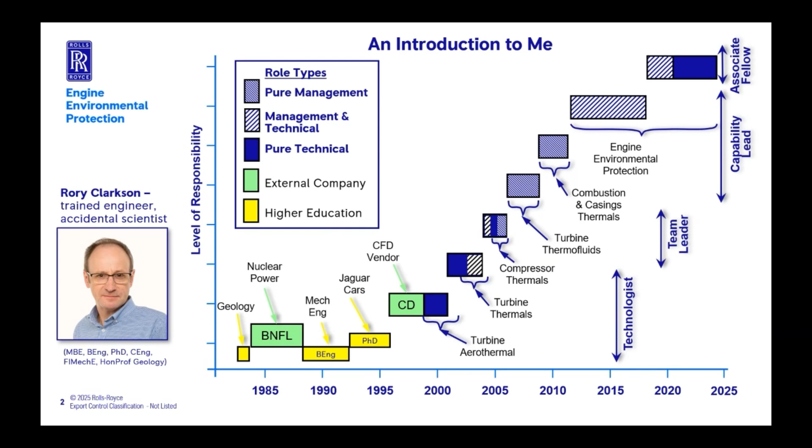But the last 15 years, in 2010, which was an interesting year for aviation for a number of reasons, I've been purely involved in this topic of engine environmental protection.

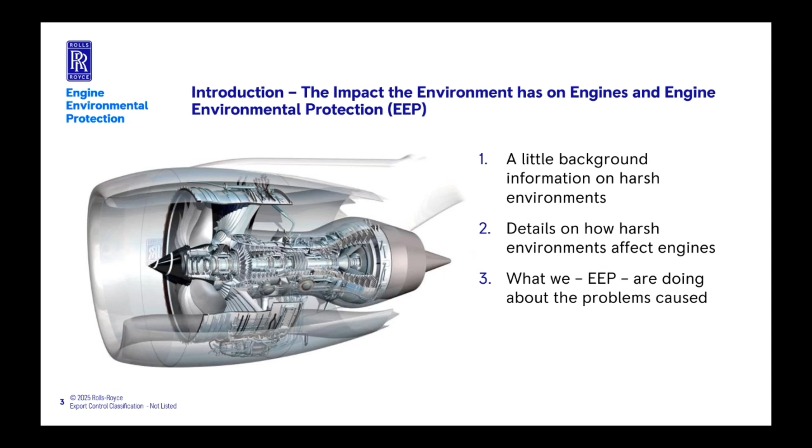So this is what I take people through: a bit of background on what are the harsh agents or elements of the atmosphere that cause problems for aircraft engines, some detail on how they affect engines, and then what we, Engine Environmental Protection, or EEP as we call ourselves, are doing to help the company and the industry mitigate the problems they cause.

Whether people realize it or not, we almost exclusively, not quite, today still design engines for an atmosphere that doesn't exist. The international standard atmosphere is a thermodynamic ideal. You talk to pilots, they've never flown in it. You never get it. We might think about what it looks like on a hot day, but that's a simple graph of the international standard atmosphere.

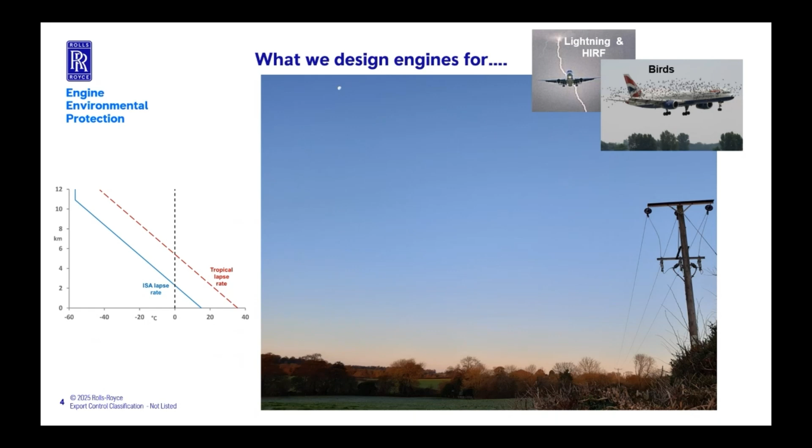We do design engines with things like birds and lightning and HIRF, high intensity radiated field, space weather, rays that come from space. We do have design rules for that, but there's lots of other things in the environment which we don't generally design to.

One thing I mentioned before we started as a preamble to one or two in the room: climate change. Climate change is having an impact, and it's changed things. Even if you take the thermodynamic ideal of the ISA, International Standard Atmosphere, it's no longer applicable, because we know the lower part of the troposphere is warming up. What people may not realize is that the stratosphere and the upper reaches of the troposphere are cooling down, and it's to do with the carbon dioxide in it.

I understand why where we are in the troposphere is getting hot, because the infrared radiation isn't able to escape, so we're warming. But apparently, I need to read up more on the science, when you get to the top of the troposphere and into the stratosphere, carbon dioxide works the other way. It actually increases the radiative heat loss out into space. So the stratosphere is cooling down, and the top of the troposphere as well.

Cruise altitudes are getting colder. We think, oh, that's interesting. Is that a problem? Well, because we design aircraft to operate at a Mach number, and we're all very clever engineers, we know speed of sound is proportional to the square root of the temperature. So if the temperature of the air you're flying in drops and you're flying at a fixed Mach number, your ground speed reduces.

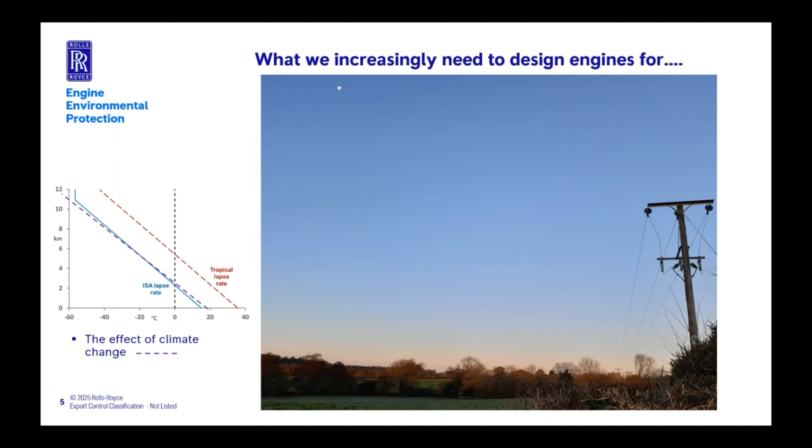But what the EEP team really focus on is things like this: the presence of water in the atmosphere, which is essentially what makes the ISA day, the ISA International Standard Atmosphere, ideal and not real, because water changes the thermodynamic profile as you go up. Water in itself causes problems, and these are the main agents that we worry about, and we'll talk through how they affect engines.

So freezing fog, freezing cloud, that's tiny water droplets at 4,000 or 5,000 feet up to 20,000 feet kind of altitude. You go higher, the water will be ice crystals, and that causes problems, or cumulonimbus clouds. At the bottom of those, you get a lot of rain and hail, and this one's lightning and things.

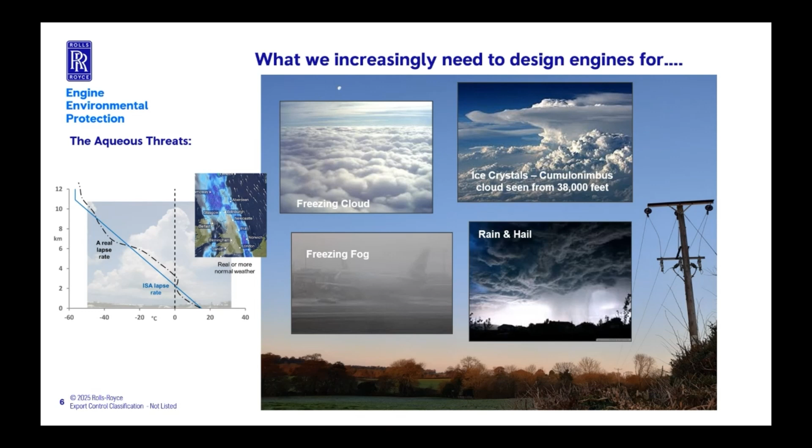So they are problematic. In recent years, certainly since 2010, the world woke up to the reality. People knew about it, but it was a select few. Volcanic ash is a problem for aviation, and volcanic sulfur is as well. Pollution from what we call anthropogenic activities, human activities in terms of transport, cars, ships, aircraft, but also production of petrochemicals, burning of coal, things like that, corrosive gases and aerosols in the atmosphere, and mineral dust, often called sand or dirt.

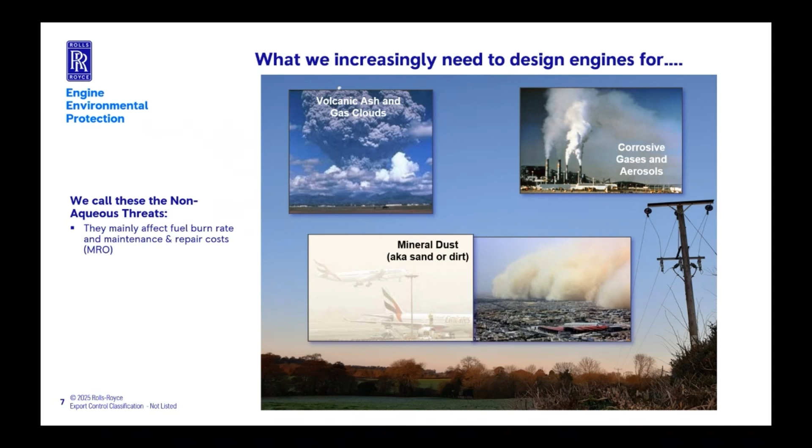So this is a little question, I won't potentially embarrass anyone in the room: why does the troposphere get colder as you go higher in altitude? I was told this at school and even part of my degree, but it never quite stacked up. It was never a complete story: as you go up, the air pressure drops, therefore the temperature drops.

If that was simply the explanation, why would the stratosphere get hotter? The pressure's dropping, but it's getting warmer. There is a... I'm looking at the faces, interesting. I'm very confident we all know the science to explain why the troposphere gets cold as you go higher.

It's to do with tropos meaning turning, the churning of the air, and that's the clue there. It's to do with the adiabatic expansion or near adiabatic expansion of an ideal gas. So you've got air down at the ground, which is compressed and at high pressure and therefore small volume. As it rises under a buoyancy effect or convection, it expands, and if you expand a gas ideally adiabatically, it will get cold.

Conversely, when it turns at the top and comes down, which is what's happening here, we're in high pressure, the air's falling and getting compressed, it gets hot. And it's that turning that is the reason why the troposphere gets cold.

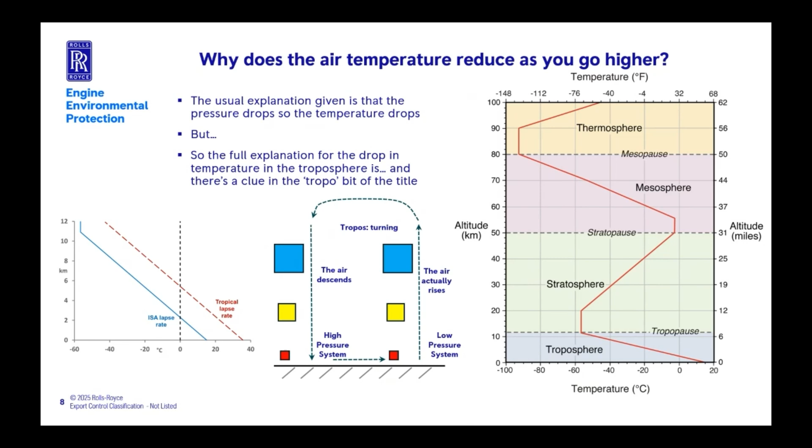So the tropopause above the equator currently is about -80 Celsius. Above us, it's about -50. And it's because the tropopause above the equator is about 50,000 feet. Here, it's about 30,000 feet. And it's to do with that. Simple thermodynamics, but that's never explained like that at school. But we can all understand that.

Anyway, that gives you an idea of the kind of science we as EEP engineers, and most of us are engineers, need to understand. So let's think about the effect of this temperature on water.

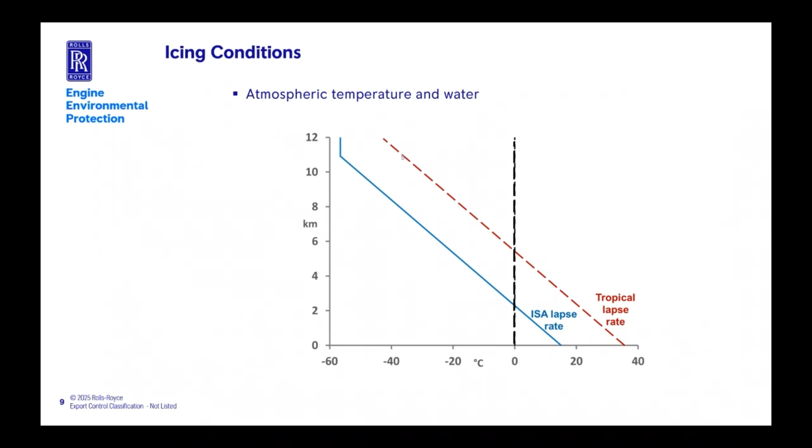Another surprising piece of information for many people is water doesn't freeze at 0 degrees C. It will, given a good excuse, like a nucleation site or a surface to start crystallizing on. But if it's pure and not in contact with anything, it can get down to about -40 before it actually forms a solid. But if it's below 0, we call it supercooled, and it behaves, if it hits a cold enough surface, it will freeze almost instantly.

If you go higher in the atmosphere, because you're now getting much colder, it's sufficiently cold for the water to actually crystallize. Sometimes it will sublime from water vapor, forming crystals of ice. So a cirrus cloud, and contrails, are ice crystals, tiny particles of ice, not actually liquid. Whereas much of the cloud, cumulus clouds you look at outside, when there are any, it's usually water droplets. And if it's high enough and cold enough, they'll be supercooled and you get freezing cloud.

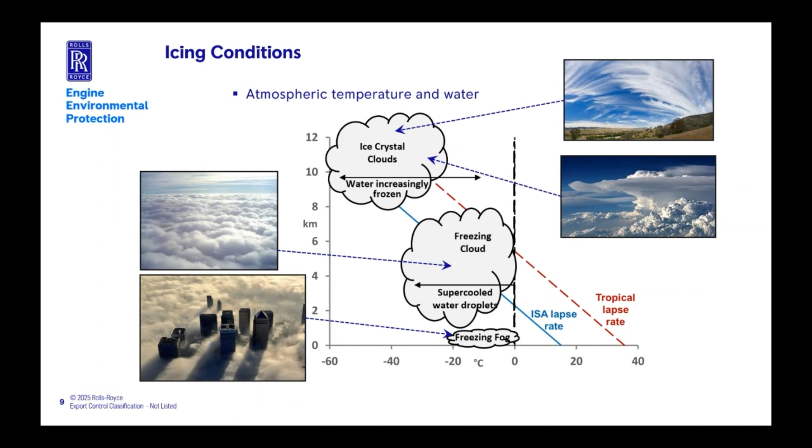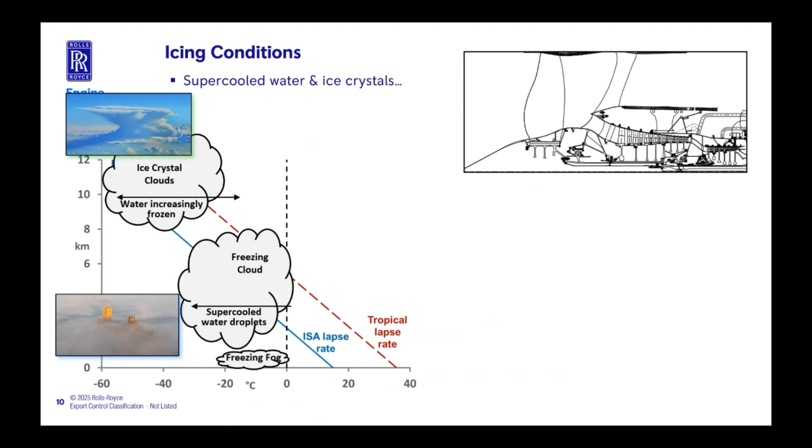Now, what do these different types of cold water or solid water do to engines? So you might recognize the sort of partial GA of a Trent, top right.

What we find is the supercooled water, when it hits the front of the engine, components need to be cooler than about 10 degrees Celsius. If they're warmer than that, there's enough thermal energy in the metal to keep the water from freezing and it will actually remain as water, but above 0. It's a rule of thumb, not that precise, but it's about right. If the metal is less than 10 degrees Celsius, the water will pretty much freeze on contact.

So you build up ice, and it'll do it around the front of the engine where the metal is cool enough. Now, it then can cause problems. We'll come back to the damage it does in a moment.

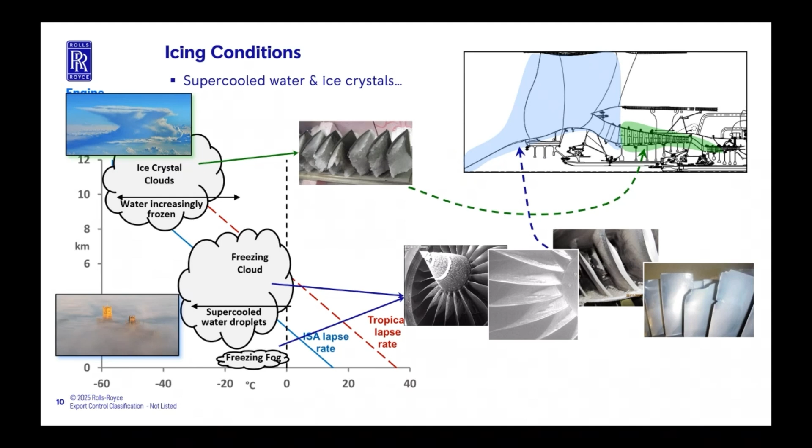Ice crystals don't actually form a problem predominantly in the front end of the engine. You need to get deep into the engine before they become a problem, and I'll illustrate how that works shortly. But you can still damage aerofoils. So this is actually some IP compressor aerofoils that have been bent by ice forming from ice crystals. The mechanical damage is one thing, but it also can cause operability issues.

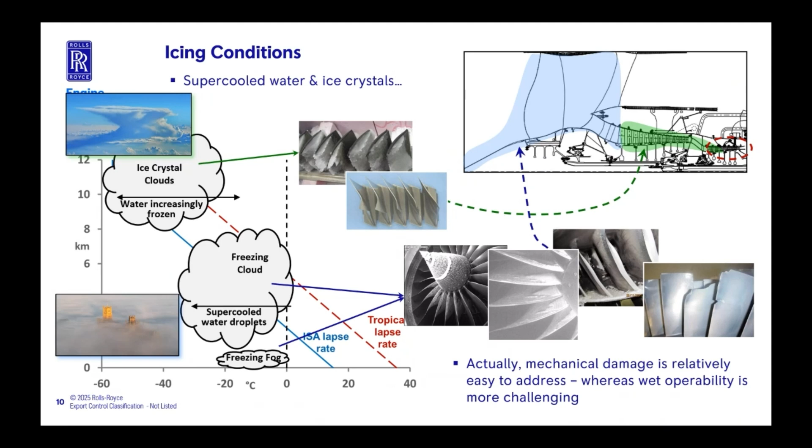But let's look in a bit more detail about the ice that builds up from supercooled water. So remember, this is water coming in at below 0. It only really can build up significant amounts if the engine's at low power, so idle, descent idle, some holding patterns, or on the ground taxiing. So freezing fog's a problem because the engine's at low power.

If you raise the engine power, the front end of the engine gets warmer, so the ice can't form. And particularly on rotor blades like fans, the centrifugal loading is sufficiently large that the ice will just get flung off. So you need to be at low power, and you'll get these icing patterns.

There's an interesting one about the rubber bung at the front, on the spinner on the Rolls-Royce engines. We say the ice won't form on it because it breaks off. Actually, the ice forms wonderfully well on it.

It does work as an anti-icing device, but it's the ice behind it that breaks off because it wobbles around, breaking the ice off behind. If you think about it, the ice forming at the center of rotation has virtually no kinetic energy. The higher the radius, the more kinetic energy.

It's more problematic — you get ice building up on the fan blades, the core inlet, engine section stators, and potentially aerofoils downstream, not so much on the rotors, though occasionally you get it on a rotor. But the problem really starts not when the ice is building up, but when it falls off.

It can fall off with a huge amount of energy, particularly on a fan blade. It can go radially out and smash into the liners. It doesn't really go backwards — there isn't enough forcing for that — but the centrifugal loading on those fan blades is enormous, and it slingshots the ice out. You can damage your impact liners and acoustic panels. When it gets into the core, it's like throwing a snowball at 400 meters per second. It's going to hurt, and it will bend titanium and potentially break it.

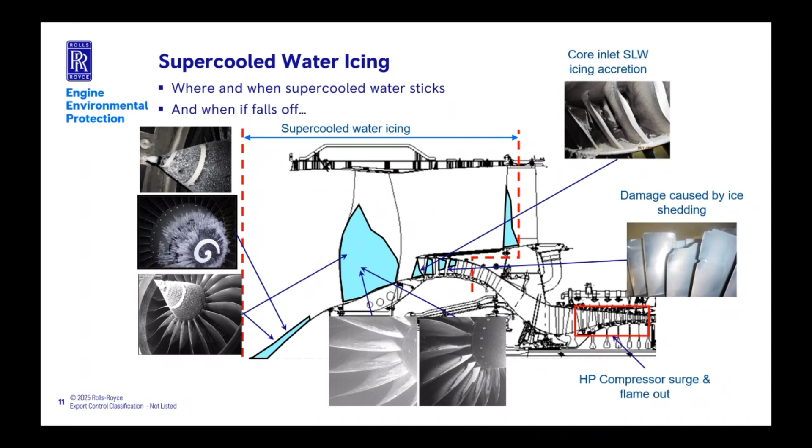You will only really encounter these, and they're certainly only problematic, at cruise altitudes above 24,000 feet, where the front of the engine is cold, so the metal is usually below zero. So the ice crystals will not hit warm metal — they'll just bounce off or break. The ones that go down the bypass duct, we don't worry about. There's not much equipment in the bypass duct that they can cause a problem with. There's one or two, but they're fairly exotic and we can deal with it.

We have had, on the RB211s, 535 E4s, and some early Trents, a fairing on the spinner which could have an asymmetric gap. One section can open up, and you get ice crystals forming in that location, causing an out-of-balance condition and high vibration. The cockpit flight vibration readings are really high — so much that the flight crew cannot actually focus on the instruments. They naturally think, what's going on? They throttle back to idle, descend, go into warmer air, the ice melts, and the problem goes away. They think, what was that? The evidence is gone, but we figured out what it was.

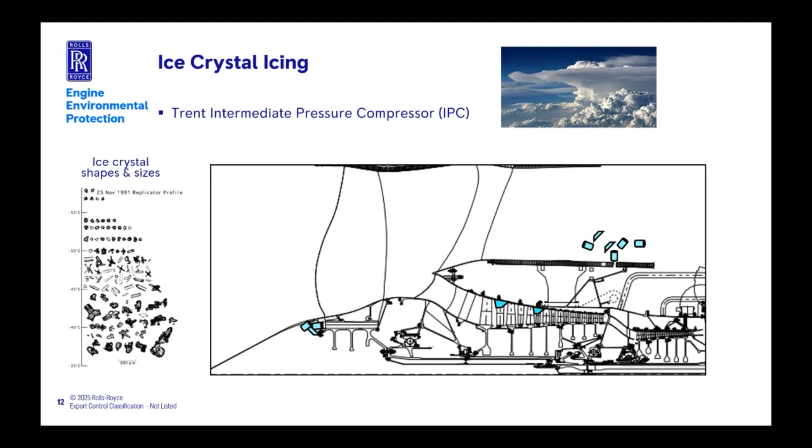In our engines, we know the Trent's at plus 11 we believe ice is formed. GE have had engines where at plus 34 they've had ice forming. It forms deep within the compressor and you get these big lumps of ice, and when it falls off you can bend a blade.

This is based on a GEnx, I think, but it's a 2-shaft with a booster. You get ice building up at the back end of the booster, you get it in the swan neck duct, and you can even get ice forming at the inlet to the HP compressor. The aerofoils there aren't designed to take impact, they shouldn't see soft body impact, so when they get hit with a lump of ice, they can break.

Those pictures are from a GEnx on a B747-8.

You also get the problem with supercooled water where a sudden release of water - it doesn't have to be that big - can cause issues. Arthur Rowe once calculated there's enough water in a can of Coke to cause the engine to surge. Not a huge amount, but you can surge the HP compressor and the flame can go out.

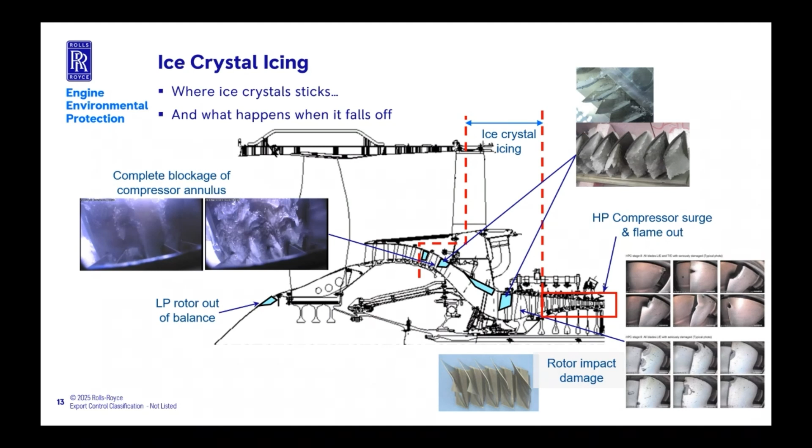It's a problem, and we've had issues with recent Trents where both engines surge around about the same time. A dual engine surge at 38,000 feet isn't clever, but fortunately the engines recover pretty quickly, within a millisecond or a few seconds. Often the flight crew don't even know they've had a surge.

Anyway, just to finish the story on the water threat - rain and hail basically drown the engine. You can ingest so much water that you contract the HP casing onto the rotors and get a heavy rub that can cause a surge, or you can reduce the T3 or T30 so much that the flame goes out.

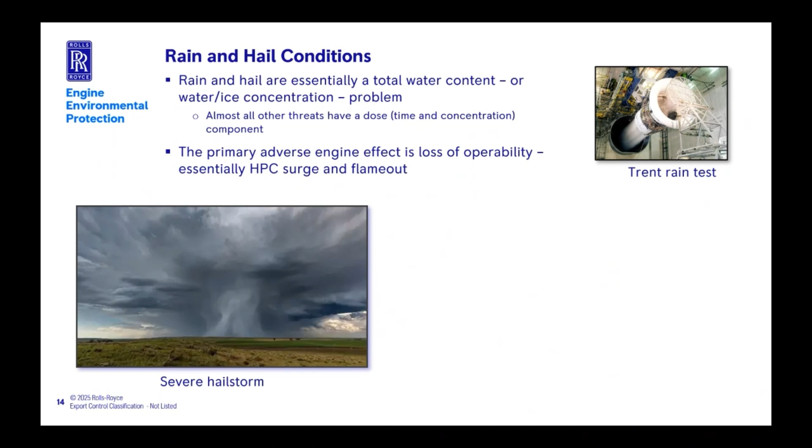This is about the only threat where it's the amount, not how long you're in it, that matters. With ice crystal, supercooled water icing, you've got to be in it for about 10 minutes before you build up enough ice to have a problem. But it's the amount of water in rain and hail that's the issue.

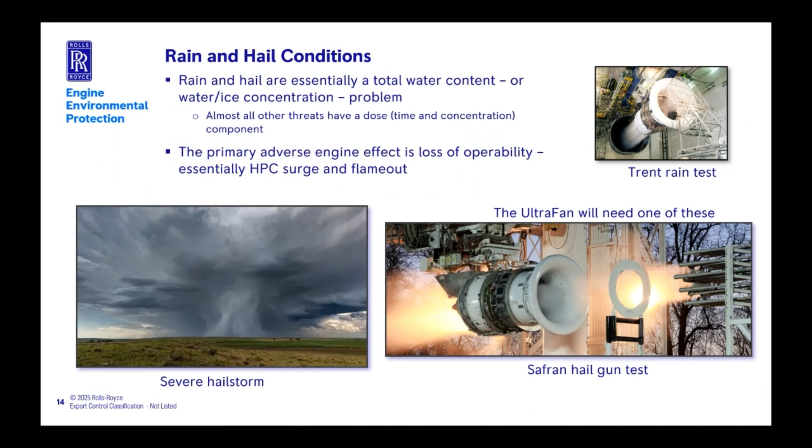We do testing - we used to do hail gun tests in Derby. I think the Trent 700 was the last time we did a hail gun test. We substituted that with an equivalent test using water, but now as we go to the Ultrafan we're going to have to go back to hail gun testing because we have no reference point to work out what the equivalent water test is. Quite an exciting test, but we're going to get back to them.

Anyway, so that was a quick canter through the water threats. Now on to where the geology comes in, which became an interest of mine in 2010 - suddenly geology became interesting.

So what are they? We call them the non-aqueous threats because they're not water. We've talked about this mineral dust, to give it its technical scientific term.

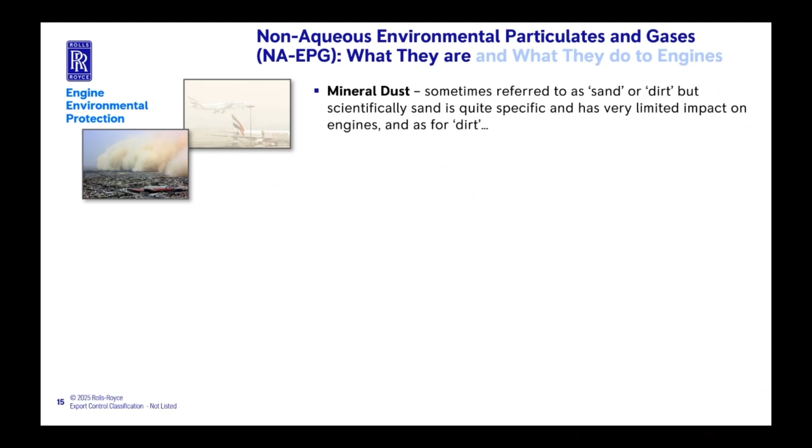You've got volcanic ash. You might think, well, it's 15 years since the volcano in Iceland - I'll try and pronounce it - Eyjafjallajökull. It's not quite right, but it's better than most people can attempt. That's actually Pinatubo, which was in the Philippines in '91. But I think at any one time, typically around half a dozen volcanoes are erupting, putting ash into the air.

Where they're having to issue advisories, the ash frequently doesn't get above about 10 to 15,000 feet, so it's only local air traffic that have a problem. But about 3 or 4 times a year there'll be a sufficiently big eruption somewhere in the world that ash gets up to cruise altitudes, and that becomes more problematic.

You've got to be in those kinds of concentrations - if you flew through that ash cloud, it wouldn't take long for the engines to stop. But at cruise altitudes, a bit further away from the volcano, the concentrations you need to be in for several minutes, tens of minutes. So the only time that's really going to affect you is at cruise.

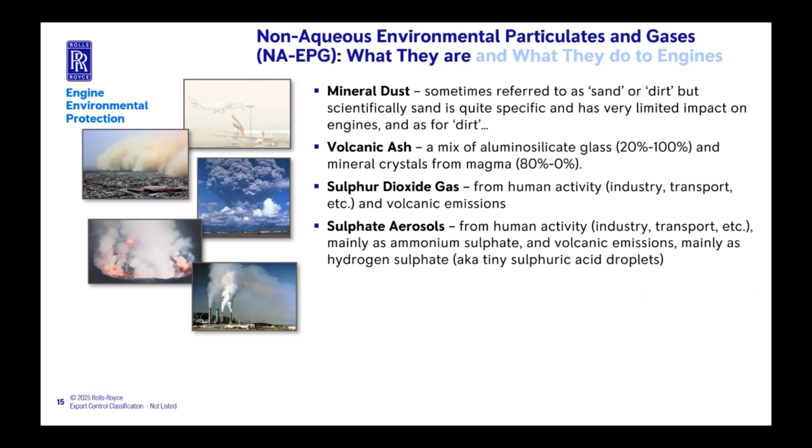Volcanoes do put out a lot of sulfur dioxide gas, and that is a problem. It's not an immediate safety concern, but it can certainly damage your nickel alloys through corrosion fatigue, or sulfidation as we used to call it, which can degrade your nickel alloys until they fail. Sulfate aerosols, actually tiny droplets of sulfuric acid, or nearer the ground, ammonium sulfate, are also a source of sulfur, and again that can cause corrosion fatigue problems.

Sodium chloride, sea salt. You might think this isn't a salty environment, we're almost 100 miles from the nearest sea, can't get much further from the sea in England than Derby, I believe. But this is a maritime environment. Heathrow is one of the saltiest airports in the world because of the North Atlantic and the Gulf Stream, there's a lot of salt in the air, and Gatwick is also very salty. Auckland's particularly bad as well. There's a fair amount of sodium getting into the engines on the test beds down there, coming from the Irish Sea or the North Sea depending on wind direction. It's worse at Skegness or Llandudno, but you get the picture.

Increasingly black and brown carbon, so soot, or actually tiny oil droplets, they muck up your compressors and you lose efficiency because it's a dirty surface and the aerodynamic efficiency is degraded.

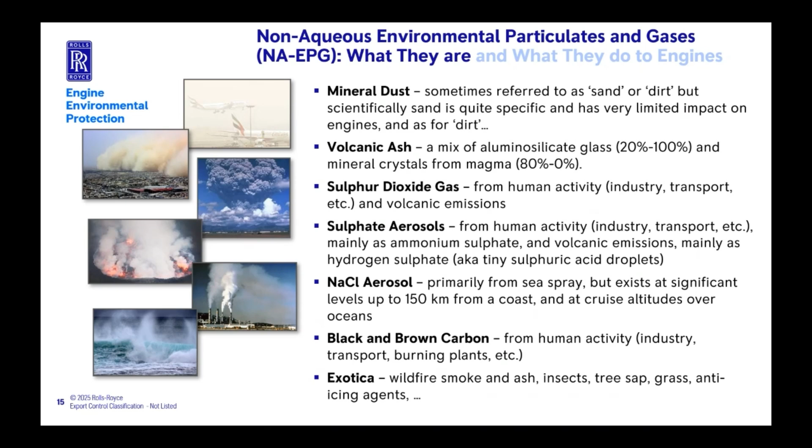There's a whole host of things that I regularly get asked about under the title Exotica, so wildfire smoke. It doesn't cause engines a problem, by the way, but people regularly ask. We've had insects, tree sap above the Amazon at cruise altitudes. The convection is sufficiently high that you can get sap from the trees getting up to cruise altitudes. It just mucks up the front of your engine. It doesn't really cause a problem, you just get an oily dirt.

Anyway, so that's what they are. What do they do to engines? I'll talk about mineral dust and volcanic ash together, and explain there are differences, but they're actually very similar. At the front end of the engine you get big erosion. These are hard particles that when they hit titanium or even nickel alloys at high velocity, they will take bits out. So you get an erosion effect, and it's not just the rotors, the stator vanes can also get eroded, usually at the leading edge and the tip. The bearings on the variables also get contaminated, and you can get fretting of those, and they start to not quite work well enough.

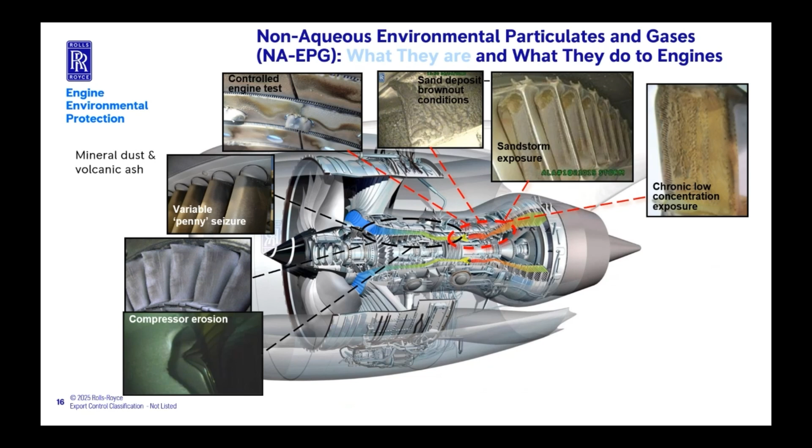But it gets really exciting when you get into the hot section, the combustor and the turbines. Modern engines are sufficiently hot that you will actually melt the mineral dust and the volcanic ash, and as a result the particles will, when they strike a surface like a combustor tile, HP nozzle guide vane, or HP blade, stick. It forms effectively molten rock or magma, and builds up gradually, and that causes a number of problems.

The one that's got the sand deposit in brownout conditions, that's a V22 engine, the Rolls-Royce AE1107 engine. There's so much deposit on that HP nozzle guide vane, although you've not completely blocked the passage, they lose about 10% of flow capacity. That's enough to shift the working line in the HP compressor above the surge line, and you lose operability margins.

That's the dramatic effect. Slightly more, I would say, chronic damage is typically experienced in the deserts around the Persian Gulf, but it's now occurring in North India, North Africa, and parts of Northeast Asia too. You get these deposits, they degrade your aerodynamic performance a bit, not enough to stop the engine, but you're burning more fuel. It drives a number of other problems - it can disrupt the effectiveness of your cooling films on the outside, partially blocking your film holes, so the components run hot and their life is degraded.

You can also get degradation of the zirconia-based ceramic thermal barrier coatings we now use to protect the metal. Zirconium oxide is a pretty robust material - volcanologists use it to scoop lava out of a bubbling lava lake, using a zirconia crucible because it's so tolerant of heat. But actually, if you get it hot enough, the composition of the CMAS, a molten rock rich in calcium, magnesium, and aluminosilicate, even that will dissolve zirconia.

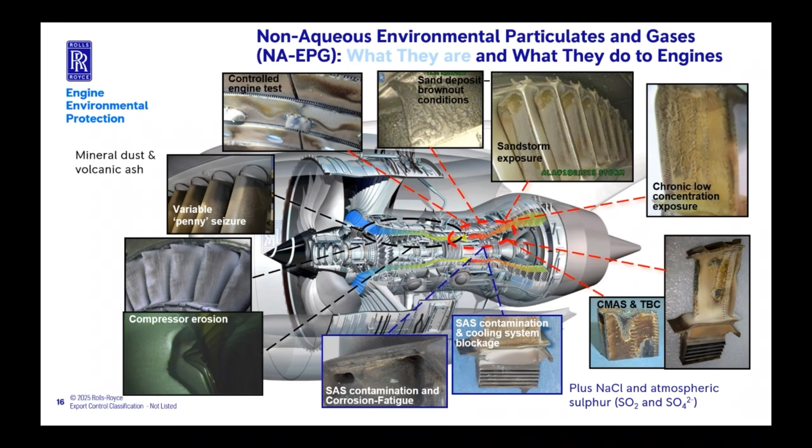GE and Pratt & Whitney have found a way to, I would say, partially mitigate that damage, but as a result, they're now using very fine detail cooling systems which are prone to blockage internally. So they're getting reduced life through the internal cooling passages getting blocked.

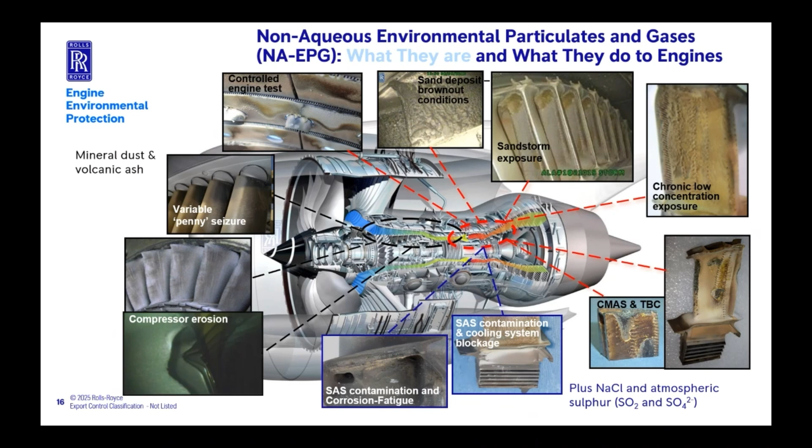And I mentioned it a while back: the corrosion fatigue. You need the calcium and magnesium, calcium and sodium that comes in, and it combines with sulfur dioxide gas, and you get sulfate that corrodes the nickel, and it fails.

The Sahara Desert, Arabian Desert, the Central Asian Desert, and the dust from those does blow across oceans. So although Barbados is not a particularly dusty island, if you go 4,000 to 5,000 feet vertically up, there's often a band of quite heavily contaminated air, contaminated with dust, and it's from the Sahara.

So as you take off and climb out of Bridgetown in Barbados, the engine's ingesting quite a lot of dust, but it's not on the ground, it's in the air.

The geographic location of volcanoes - well, the Pacific Ring of Fire is often known to many people. Yeah, there's a lot of volcanoes around there and other locations. But what you find is near the equator - I think Indonesia is the most volcano-dense country in the world, just ahead of Iceland. There's a lot of eruptions. There's usually 3 or 4 volcanoes in Indonesia that are erupting.

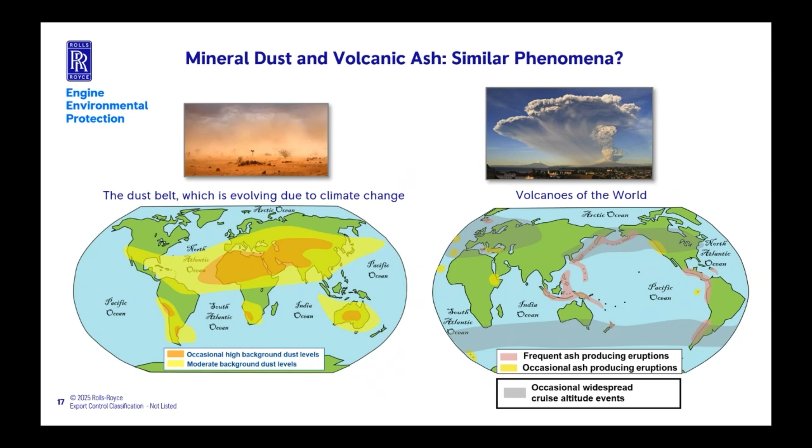It's not good to fly in a volcano in Indonesia, as British Airways BA 9 in '82 found out, but actually there's more damage and more incidents associated with these high latitude volcanoes because the plume spreads out.

So that's one difference. Now I'm looking at the geology of mineral dust. So there's a photograph of a desert with dust. It's the dust in the air - it's not the dust or sand on the ground that's the problem.

The engines, particularly in a civil airport where you've got a prepared runway, tarmac, there's not much dust on it. So the engines won't suck dust off the runway. People thought that's what the problem was. No, it's the dust in the air.

So how does the dust get there? Well, it's wind. There's obviously sediment on the ground, dry soil, very dry, and the wind lifts it off the ground and elevates it, and it can get it up to about 15 to 20,000 feet.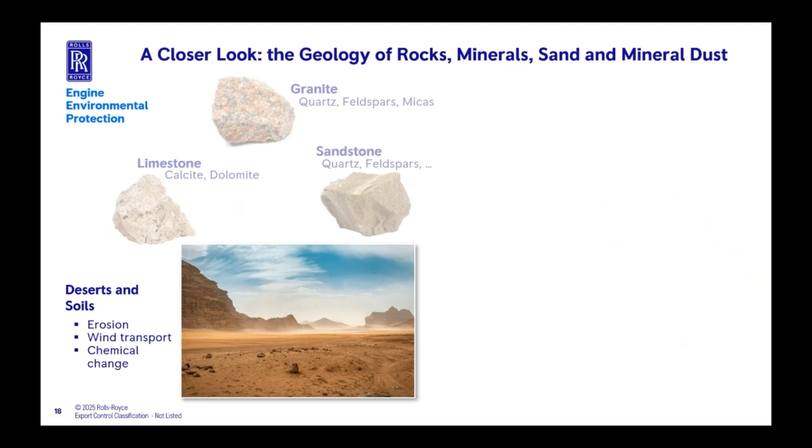But what we're really interested in is the composition of that dust. Now, the mountains around the desert or the bedrock are made up of these kinds of rocks - I can imagine you've heard of them: limestone, sandstone, granite. There's plenty of others. The geology I remember as a young person in my teens and early 20s was that a rock like granite is made up of a number of different types of mineral.

The mottled pattern on granite is because there are three main mineral groups: quartz, feldspars and micas. They're all aluminosilicates. The white in the granite is quartz, the pink is the feldspar, and the slightly darker grey is the micas. But when you break that piece of rock up into smaller and smaller bits, below a millimetre, becoming dust at about a tenth of a millimetre, it's not granite anymore. It's fragments of quartz, feldspar, and mica.

The same is true for limestone. It's predominantly made up of calcite and dolomite. Dolomite is magnesium calcium carbonate, calcite is calcium carbonate. Same with sandstones, they get broken up. Feldspars are not very stable in the atmosphere; left long enough with a bit of water and time, they form clays, which we're all familiar with. But that's what the dust in the air is made up of: tiny fragments of these minerals.

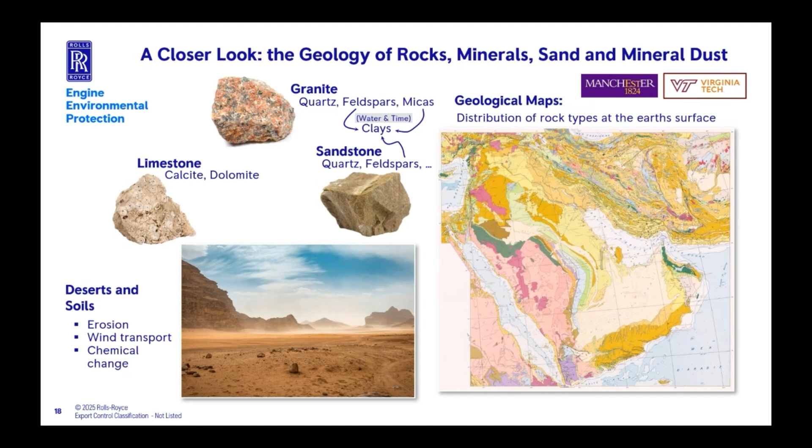There are a few other minerals too, we'll talk about them in a minute. It isn't just tiny bits of rock. The dust is a cocktail of a wide range of different minerals, aluminosilicate minerals, carbonate minerals, sulfate minerals, and occasionally sodium chloride. The composition varies depending on where you are on the planet, which shouldn't surprise a geologist, and it doesn't, because that's the Arabian Peninsula. The rock that makes up the Earth's crust there is a whole variety of sandstones, limestones, granites, and ancient metamorphic rocks, 3 billion years old. That all gets weathered, broken up, and elevated into the air.

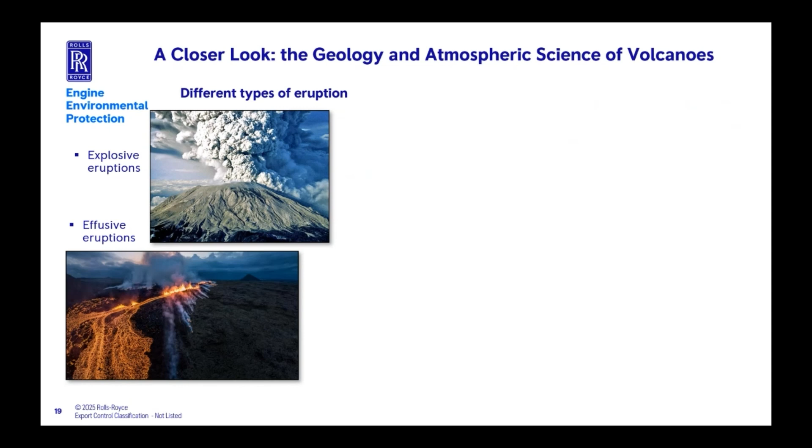Volcanoes are very dramatic, very exciting to young people, kids love them. There are other classes, but at the extremes you get explosive eruptions and effusive eruptions. There's a volcano that's been erupting on and off in Iceland for about 3 years now, that's like the effusive eruption. It's oozing lava out and a fair amount of sulfur, that's not a problem to aviation. It's the big explosive ones that put a lot of particulates high into the atmosphere.

The science you need to understand the threat is really the technology behind satellite detection of these ash clouds, where they are, but also mathematical modeling. They basically do CFD models of the atmosphere, seed it with what they believe is the quantity and altitude of the ash, and model where it goes. The UK is very good at this, as are the US, the Australians, and the Argentinians. We work pretty closely with these universities and the Met Office, so we're very lucky to have access to a lot of expertise, but you need to know how much and where it is to really understand this problem.

So that's the science. But let's look at whether it actually matters as far as the engine's concerned. People in 2010 were very concerned that volcanic ash is really dangerous. We've had engines fail in volcanic ash, but we've not really had engines fail in mineral dust in desert environments. So why would ash be more problematic than desert dust? Well, volcanic ash is essentially aluminosilicates, but that's also true of mineral dust, although there are carbonates and sulfates too.

So chemically they're not that different, but the actual material structure is, because volcanic ash forms from very hot liquid rock that then cools very quickly. Silicates take a long time to crystallize properly, and if you chill them at a reasonable rate, minutes to hours rather than years, it forms a glass. A glass is an amorphous solid with a different melting characteristic to a crystalline material like ice or quartz. Not only does it melt differently, it tends to melt or go sticky at lower temperatures than a dust like quartz or feldspars. And often if it's a pumice, with a lot of gas expelled as the volcano erupts, it can be much more abrasive, like glass paper as opposed to a crystalline material.

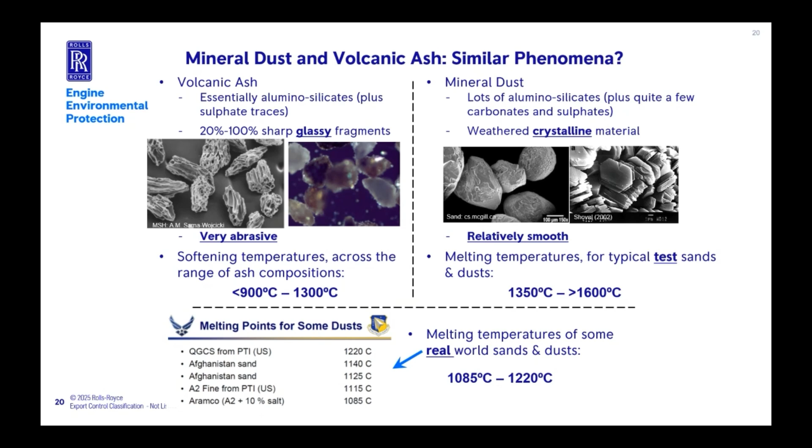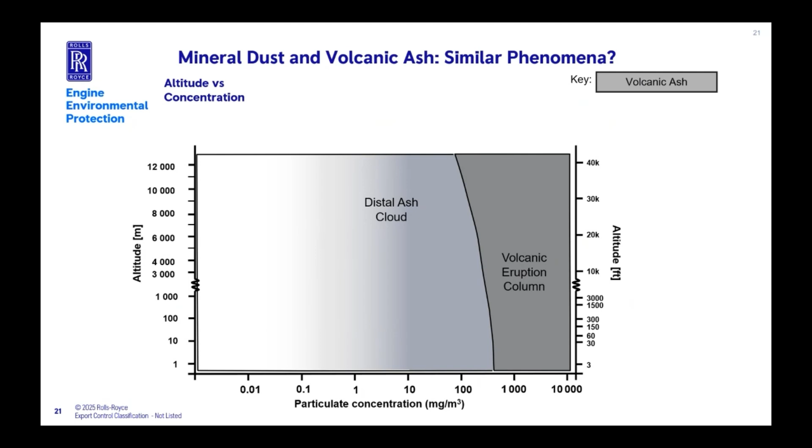That range of concentrations and altitudes from the surface right up into the troposphere, into the stratosphere, you can find volcanic ash in any combination of those. To get very high concentrations, you need to be in the eruption plume. But the key thing is that the eruption plume can go all the way through the troposphere into the stratosphere. There are some pictures that illustrate those phenomena.

If you look at mineral dust, because it's only elevated into the air by the action of wind on the ground, it's limited - one, in the concentration you can get to, and two, how high it gets. It's surprisingly high to a lot of people. But even if you get a biblical sandstorm, like a 1 in 100-year sandstorm, although they're occurring every 10 years now, you might get up to 10 milligrams per cubic meter, maybe 30 milligrams per cubic meter near the ground, but it attenuates fairly rapidly.

And this, for me, is the key difference between volcanic ash and mineral dust. Naturally occurring mineral dust - there's some photographs here to illustrate that - is limited in the concentration it can achieve, or you can expose yourself to. At cruise altitude, you can get mineral dust, but you need a convection system like one of these in the photograph there.

Aviators will avoid them, not because they might contain mineral dust, but because they contain a lot of horrible things like high turbulence, a lot of water, ice crystals, things like that. It's not much of a problem.

There is another class of mineral dust occurrence in the atmosphere, and that's what we call aircraft generated - when you've got a helicopter or a tilt rotor in brownout condition. They will produce concentrations of sand similar to the concentrations you get in the plume of a volcanic eruption.

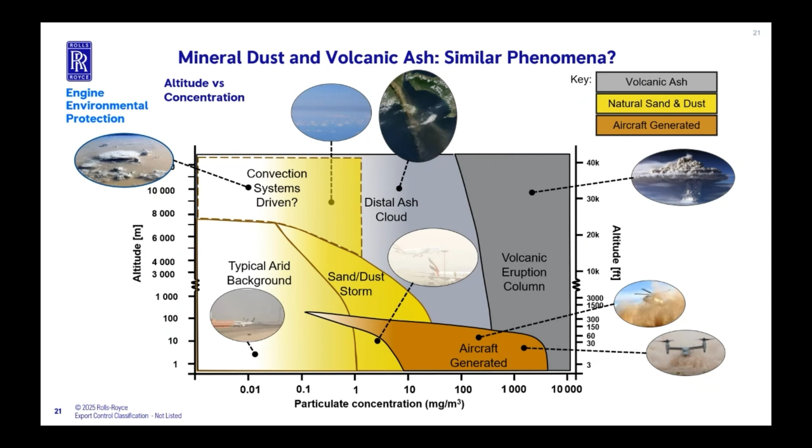And that, to me, is the big difference between volcanic ash and mineral dust. It's not the nature of the materials, it's how they present in the atmosphere. Volcanoes can put very high, problematically high concentrations at cruise altitudes. Mineral dust - that won't happen.

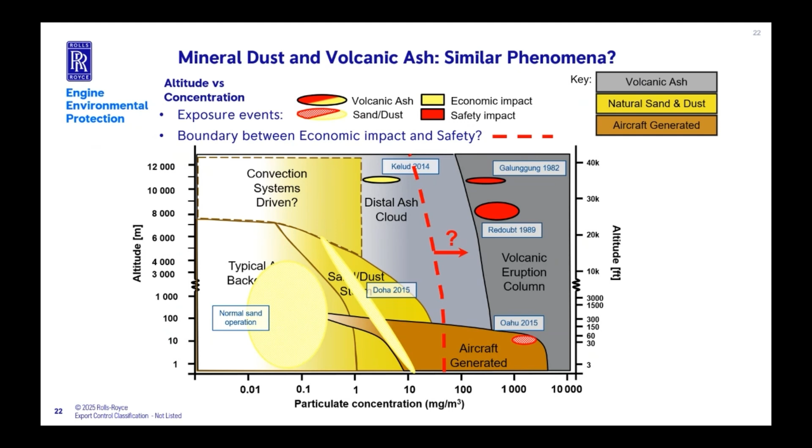So this is the bit where I was very fortunate in getting a lot of recognition and got to meet the King's sister as a result.

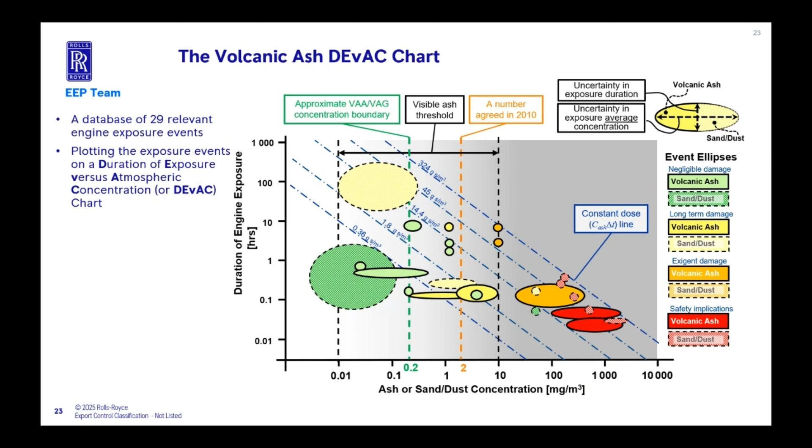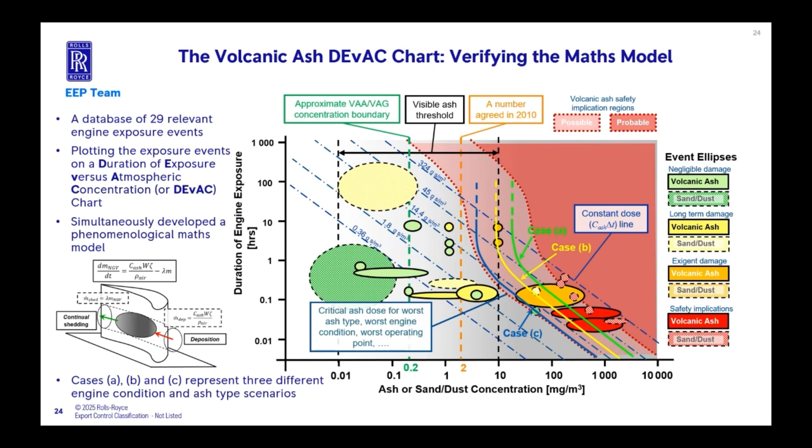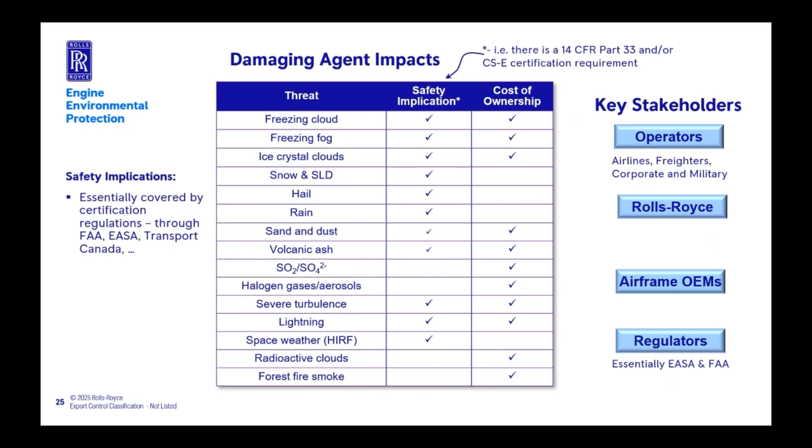The safety implications, requirements or definitions are set by the regulators - the FAA, the EASA are the two main ones, but there are others. When it comes to cost of ownership, you've noticed I've got the aviation stakeholders - the airlines, the engine manufacturer, the airframer, and the regulator. Because of the way we do TotalCare contracts, it's only really the engine manufacturer, or in our case Rolls-Royce, that really worries about it.

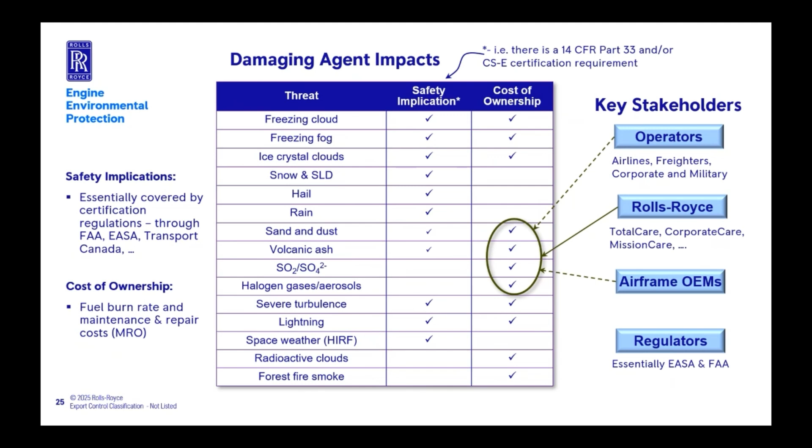The operators don't like it, but you'll see that slide coming up that most of the liabilities are on Rolls-Royce. The airframers are worried because if the engines are no good in the desert, their reputation suffers and they can't sell their airframe. But the cost of repairing or maintaining the engines is down to Rolls-Royce.

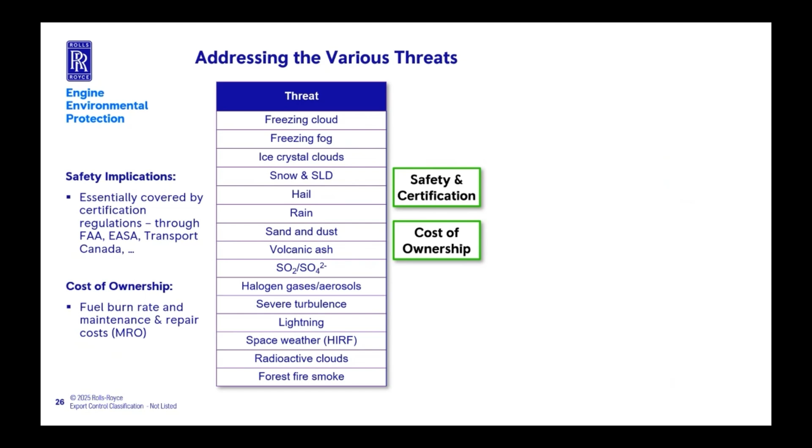Whether it be safety or cost of ownership, the approach EEP uses to assess the impact of these is to calculate the rate of damage or the degree of damage. We attempt to improve the design, either retrofitting or making changes to engines in service, or when you design a new engine, try and get the chief design engineer to allow for the fact there's a real environment out there. But increasingly, we're looking at recovering costs through cleverer service contracts.

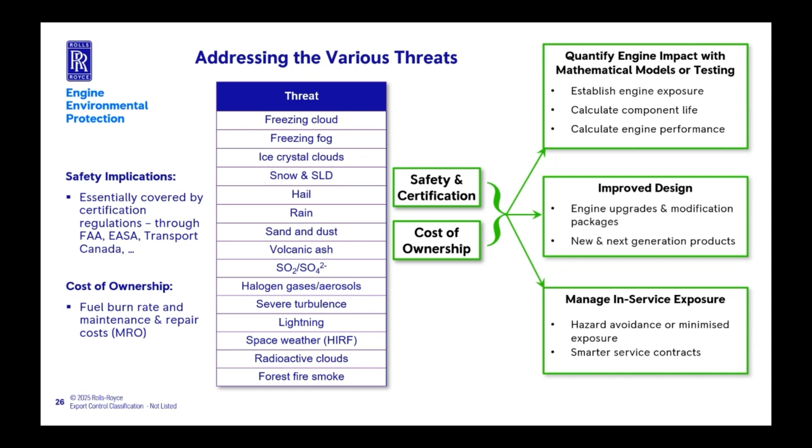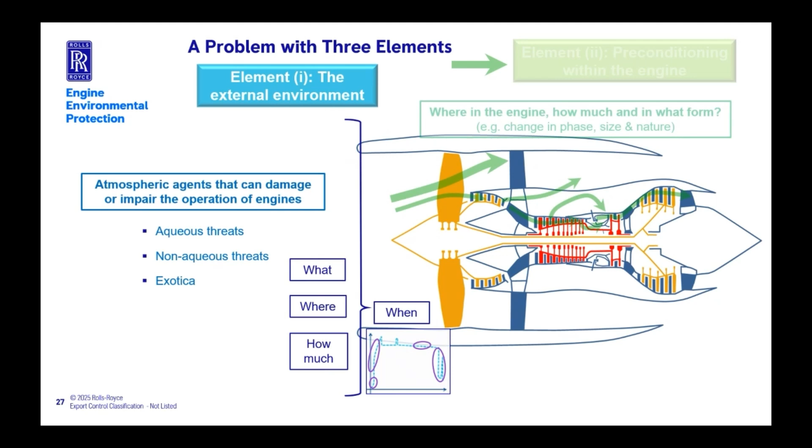Now there's another approach we developed as well to break down the problem, which is to break it up into three elements - so there's a wireframe of a three-shaft engine. The first thing is to understand the nature of the contaminant in the atmosphere, so what it is, where it is, and how much it is. Once you've got that, you can work out when it comes into the engine and how much gets into the engine. And from there, you can start to figure out what happens to it in the engine.

So element two is what happens. You've worked out how much comes in, now you've got to work out what happens to it. In ice crystals, it's got to melt and refreeze. Mineral dust, you'll see in a minute, can undergo a number of changes before it actually gets to a damaged site. Once you've done all that, you can start to work out the actual rate of damage, be it corrosion effect or a cooling system blockage effect.

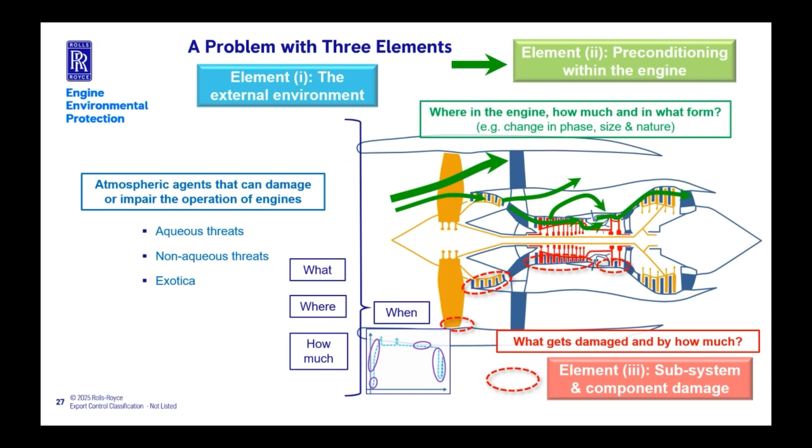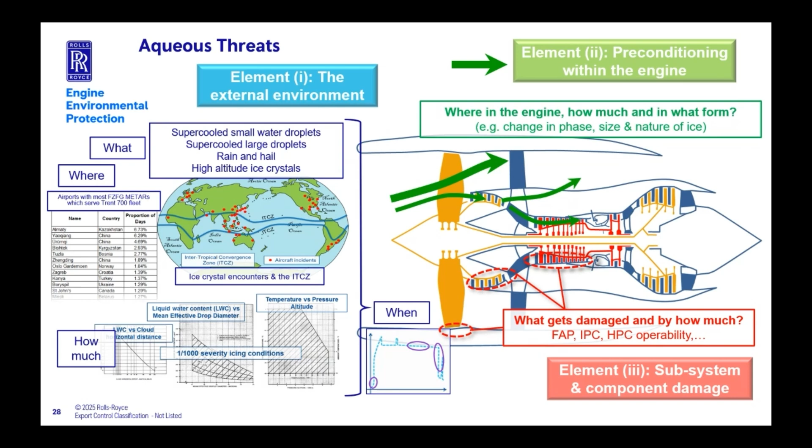Now, to illustrate that, take the water threats. There's a lot of complexity about understanding the nature of the water threats in the atmosphere, like the altitude the water gets to, the rate or frequency at which you get freezing fog conditions, where on the planet you get high ice crystal conditions, and it's usually between the tropics where the air's sufficiently warm, you can get a lot of water high. Most of that's defined by the regulators or pretty well understood science, although that's still improving.

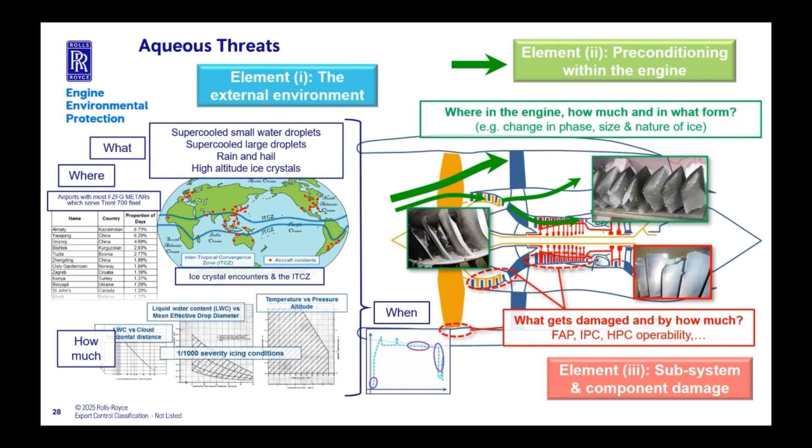The challenge comes to how you model the impact on the engine. We're only really just beginning to do that. And then you can start to advise the compressor blade designers how to design their compressor blades to withstand it.

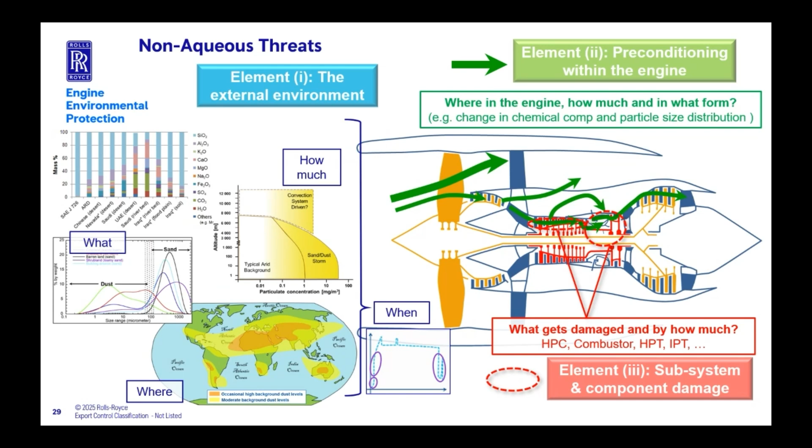When it comes to mineral dust, although we've got a reasonable understanding of its nature in the atmosphere, certainly better than we had 10 years ago, there's still an awful lot we don't know. We have found out in recent years that when mineral dust comes in the front of the engine, it undergoes two key changes: its particle size distribution goes from relatively coarse to much, much finer, and that changes the way it behaves and where it can get to.

We've also found out that the composition changes because it undergoes very rapid heating. Some of the minerals break down and form new minerals. It's basically metamorphic rock formation, but not on geological timescales. This is all happening in milliseconds or fractions of seconds. In geology, it takes millions of years. This is why the geologists get really excited about this. The only natural phenomena where you get these heating rates is when an asteroid hits, and that doesn't happen too often.

We do a lot of testing, very expensive. The far right is an ice crystal test at NASA Glenn in Cleveland. One of those tests, we haven't done it yet, but the cost is coming out around 30 to 40 million pounds. Not cheap. The ones in the middle are typically 4 to 5 million. Not cheap, but the company's prepared to pay for those.

But we're also finding getting lots of data from in-service engines is very useful. Poor quality data, but a lot of it is still very useful. So we use those techniques.

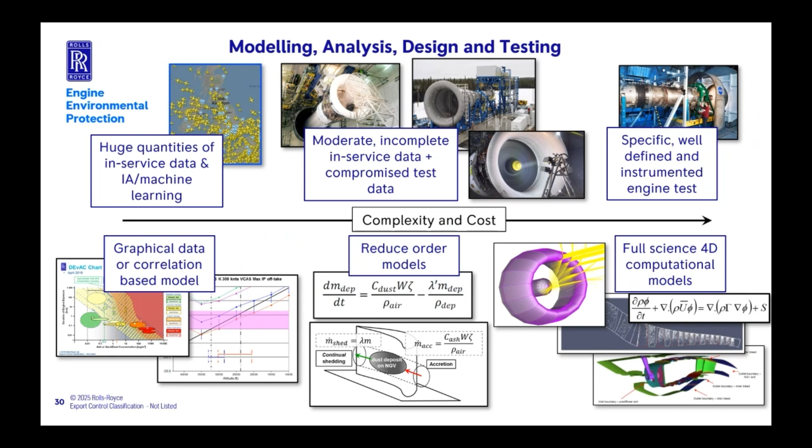They did try and mitigate that by putting a clause in that said if you operate your engines in abnormally erosive or corrosive environments, you're paying. But their clever lawyers said, well, define what you mean by abnormally erosive and corrosive. And we thought, that's very subjective. We then had to go, well, it'll be abnormal as defined by the airworthiness authorities. But then, who are they?

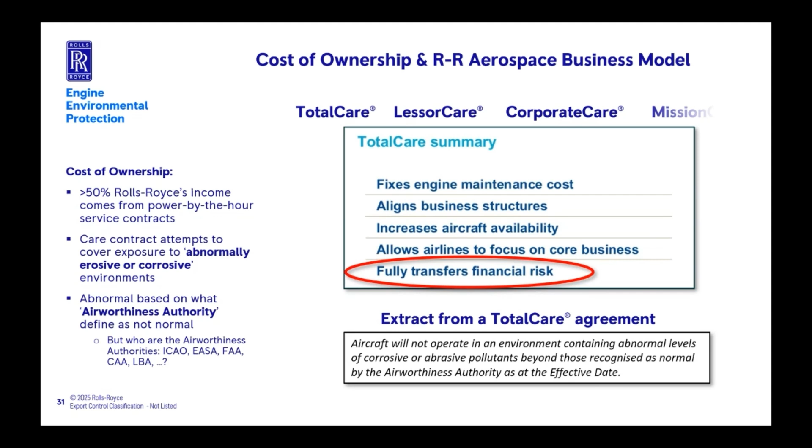You might think you know who they are. EASA don't call themselves an airworthiness authority, they're a certification agency. The CAA are not an airworthiness authority either, they're an aviation authority. So it's not clear what do you mean by that. One thing we started to do as a company about 15 years ago, and again, before I got involved, was defining airports where we thought there was a lot of sand and the engines would degrade.

Was it Justin Statham? Jason Statham. But that was a picture that illustrated it.

We got our field officers to look out their office windows and say, is it sandy outside? And these are the airports where they said it was. Actually, Alice Springs and Las Vegas are not very sandy.

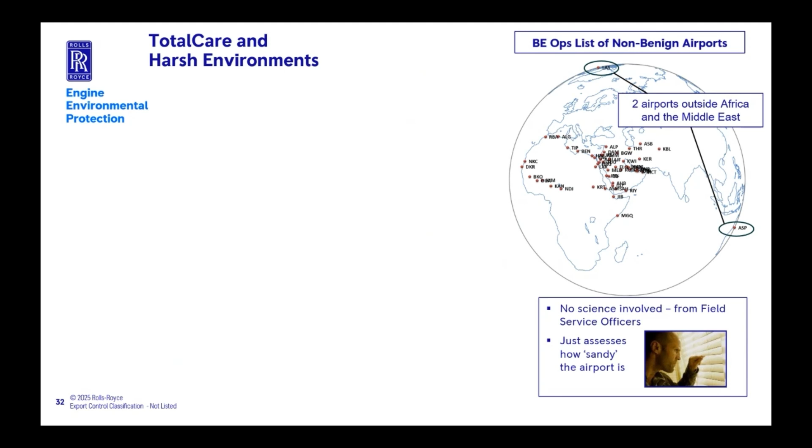We said that's terrible. After a lot of lobbying and arguing, we got some science data from the atmospheric science community. We said, actually, if you ignore Alice Springs and Las Vegas and take the most benign of the 50 remaining, any airport worse than that we'd include on the list.

It came out at 276, and you can see a lot of Asia, Central Asia, and even the Caribbean came in. They've now implemented this, and they reckon it's saving the company hundreds of millions, if not billions, in improved revenue.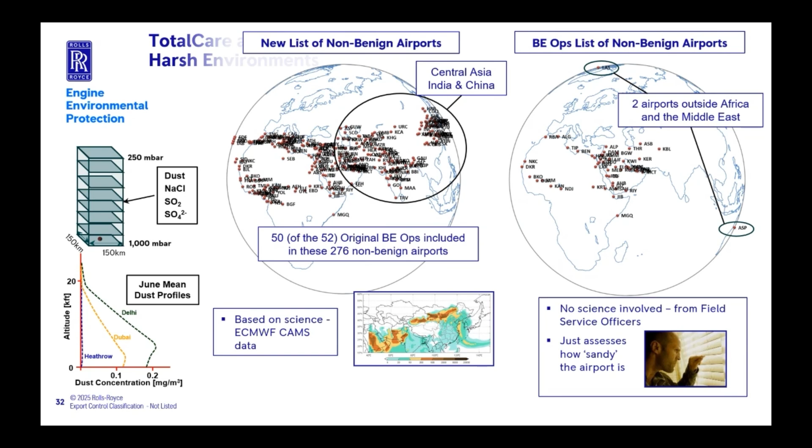A few more slides, I'll whiz through it, and then we'll get to questions. Again, from the initial assessment 15 years ago that it was just sand at the airport, we said well, it's not just sand at the airport, but on the flight route.

This was some work done at Reading University a couple of 3 or 4 years ago, where they said you might think Delhi is a relatively dust-free city, but at this time of year, the dust levels at altitude are worse than Doha or Niamey in Niger, in the desert. Phoenix, you might think it's in a desert, you might think it's dusty, but actually the dust levels there are an order of magnitude smaller than places like Delhi, Doha, Niamey, and Abu Dhabi.

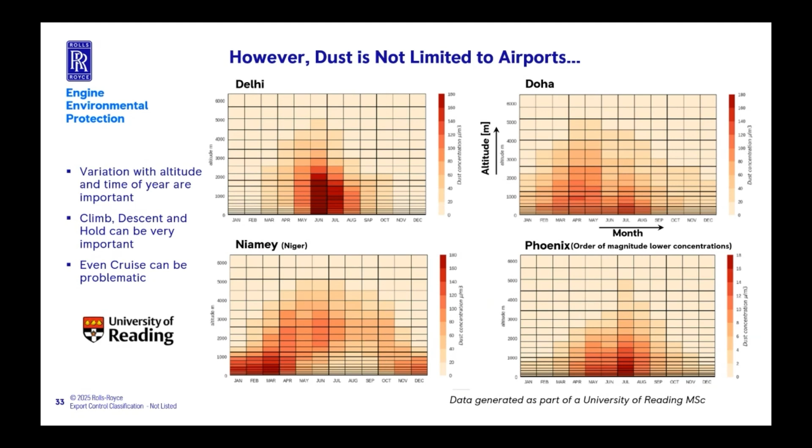It's not just the quantity of dust - I said we'd come back to this - composition matters a lot. Delhi and Dubai or Doha, the dust levels are similar.

But if you look at the composition of dust in Delhi, it's relatively benign because it's mainly quartz and feldspars with a few clays, whereas the dust in Abu Dhabi, Doha, and Dubai has a lot of calcite, dolomite, and gypsum, which are full of calcium and magnesium. That's a big problem for CMAS damage, and that's why we're seeing CMAS damage in that region. We do see it in Delhi, but not at the same rate.

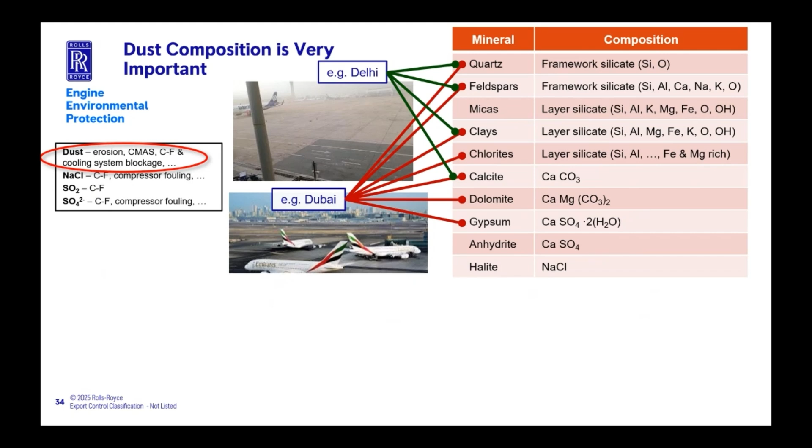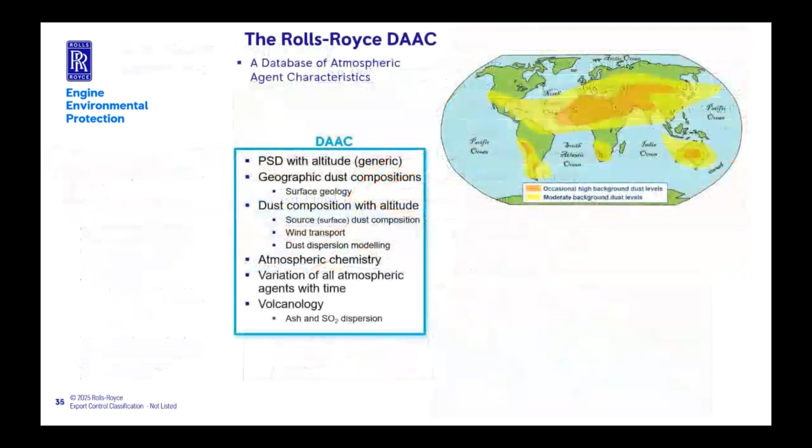Beijing is similar to Delhi. We have tried to map out where you're going to get the really damaging minerals. We thought soil maps would be useful, but the scientists say actually they're not. What you really need is a bespoke database, and we got Manchester to look at sources of information, so we've got a better understanding of the composition of mineral dust on the ground. We need to convert that to dust in the air.

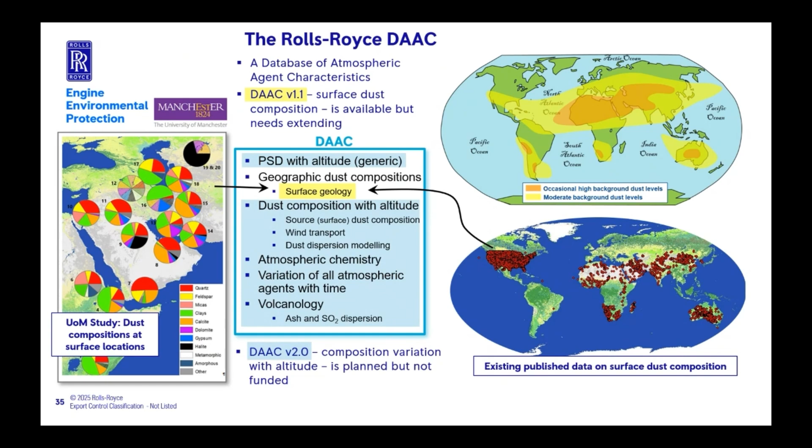So this is my final slide. Some final thoughts as I'm 2.5 weeks from retirement, but I'm not disappearing - I've got a plan. Working in engine environmental protection is interesting.

You do stuff that other engineers wouldn't do. It might look a bit sciencey and complicated, but actually, if you spend a bit of time, you can get your head around it. Most of the geology and chemistry I've talked about here, you would cover at school - school level, not degree level.

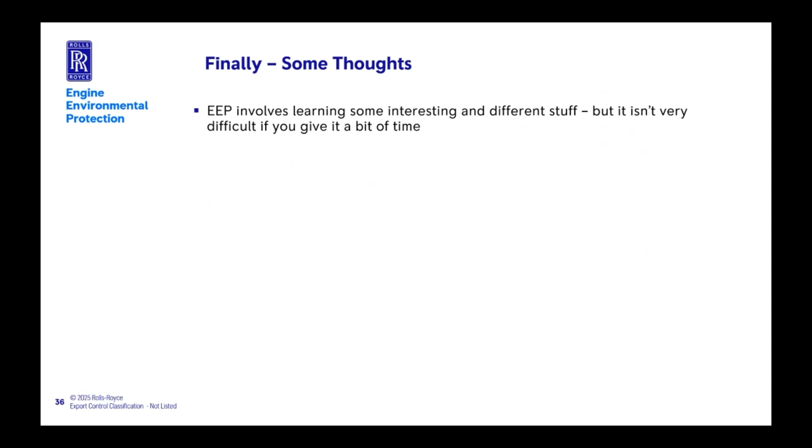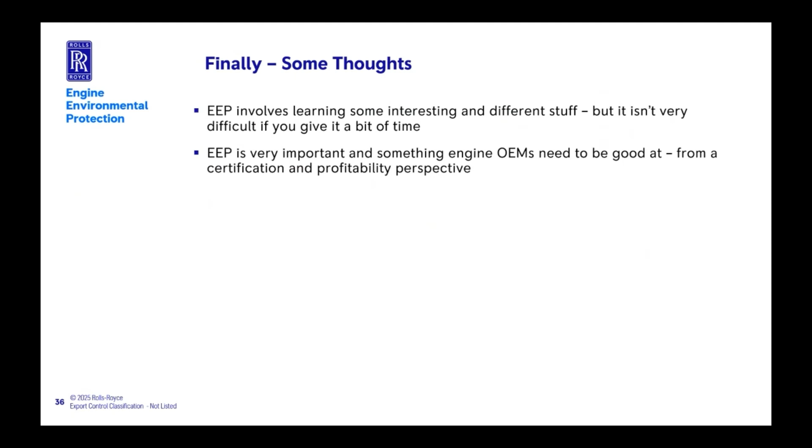Rolls-Royce has realised you need it. We do collaborative work with Pratt & Whitney at Virginia Tech. GE never like to talk to anybody about what they're doing, but you can figure out what they're doing from media press releases - they are beginning to realise they need this kind of capability as well. They need to get access to geologists and meteorologists and people like that.

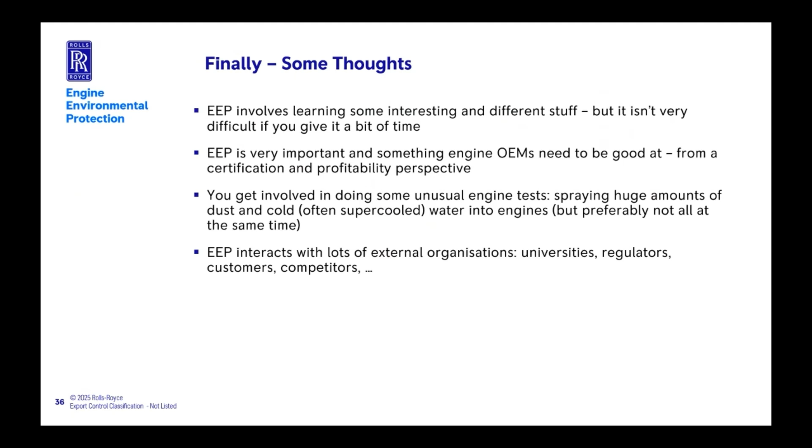We do get involved in some really quite cool, exciting tests - well, cool because they're icing tests, but quite exciting - putting dust and water into engines. Personally, I've had a terrific 15 years travelling, not all the time, but some of the time going to exotic locations like Buenos Aires, Wellington, and Tokyo to talk to scientists about atmospheric phenomena and what it does to engines.

This is tongue in cheek: chief engineers do like to design beautifully fuel efficient, cost efficient, weight efficient engines, and then we say, yeah, but it won't survive, and they have to modify it.